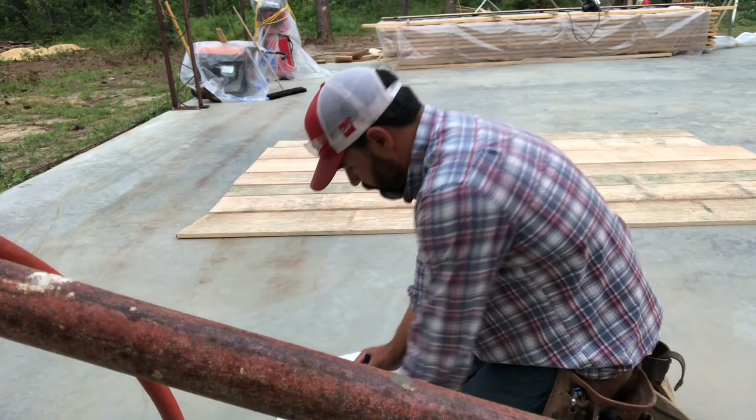Hey guys, Jeremy Moore, and I'm going to show you how I'm building this 30 by 40 workshop. I want to show it to you start to finish.

Approaching something like this can take many different shapes. I've seen videos where people are spending $35,000 on a shop, $25,000 on a shop. I'm going to spend $6,000 on this shop. A driving factor in all of these videos that you'll see, cost plays a huge role.

I am not the kind of person who opens the drawer of my toolbox and there's a checkbook. I want you to understand that as I make these decisions, sure there's going to be people that say those frames look ridiculous, that lumber is going to be, you know, there will be people who critique it. I know there are other options. I'm trying to document an option that says it can be done on a budget that most people think is not possible. You'll realize that you can grow.

I've certainly never laid brick, but I had never laid block until I laid the block for this house. I had never cut up lumber, I've never used a bandsaw mill to cut up lumber. Now we have bandsawed lumber. So there are things that you might say 'but I can't' - I'm willing to say, I bet you can.

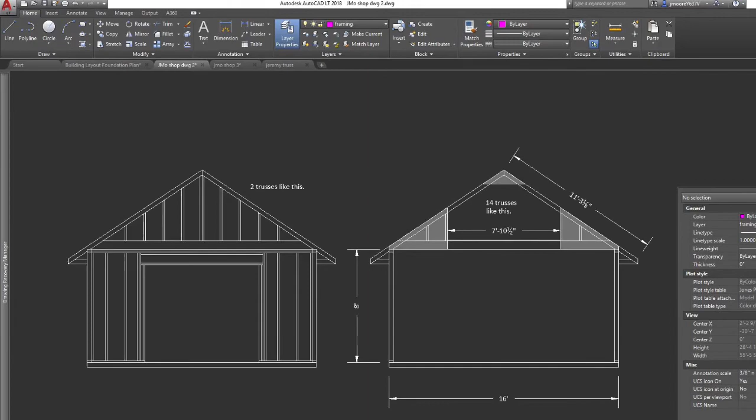My thoughts immediately gravitated to the idea that, hey, I don't even have to buy the kit - I can make the kit. Because now, even though some of the components had to be full length and long and straight, the internal webs between the two chords, they could actually be...

some salvaged lumber, or most lumber supply places have cull piles where they throw away either bent or broken, or warped lumber. And so you could improvise, and cut some otherwise not useful boards into short sections, and over those short sections they're straight enough, or strong enough, whatever the case may be - they would certainly work as webbing.

I didn't have to make a bunch of these frames, just a few, then connect between them with dimensional lumber or purlins that would span the distance, and those could also be things I could possibly salvage from other places. So the design was really starting to take a different shape. All of this was intended to be built out of wood, because that was something I could work with easily, so it certainly was going to look like a home built structure.

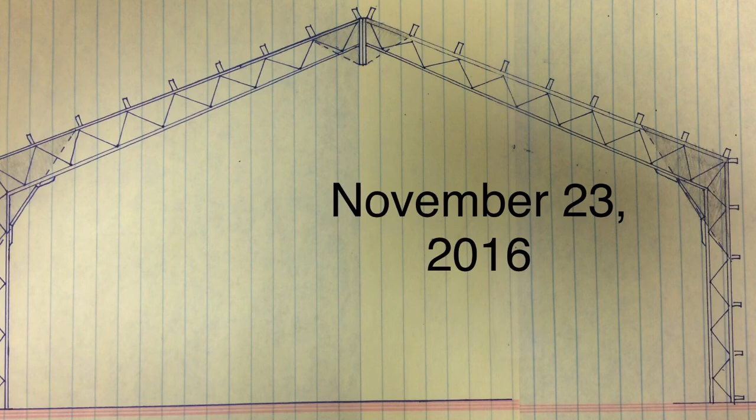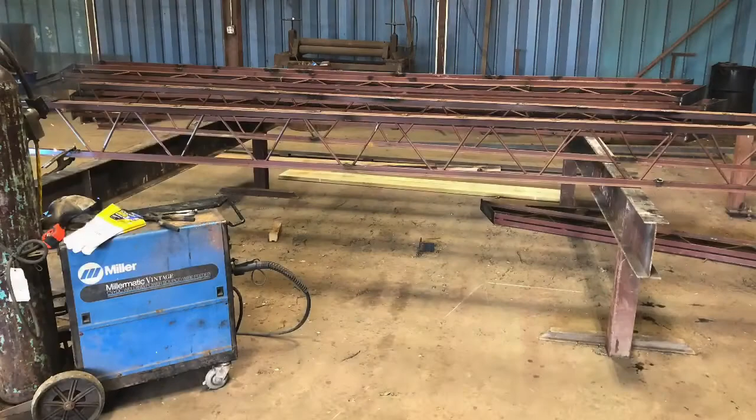But then all of a sudden, we were working on this job and had to do some demolition work, had to tear out a roof structure, and it turned out the roof was supported by a bar joist. I wasn't there when they were taken down, but I came up on the job as these were being thrown away, and all of a sudden the whole design changed. It really started to take shape, and I realized I had stumbled onto a treasure I wasn't going to have to improvise or make. These things were already ready. All I had to do was make it fit the shape I wanted.

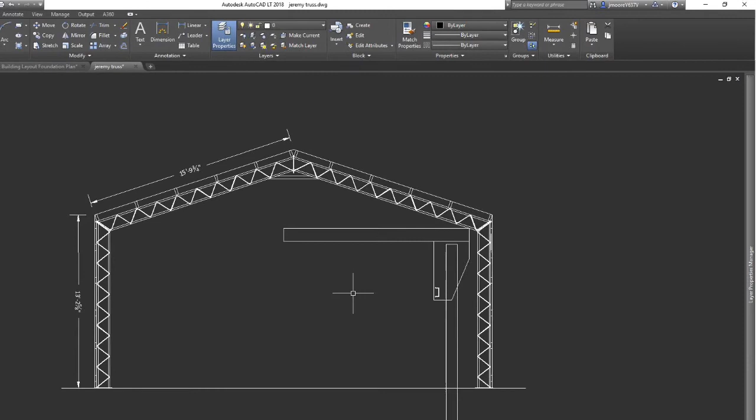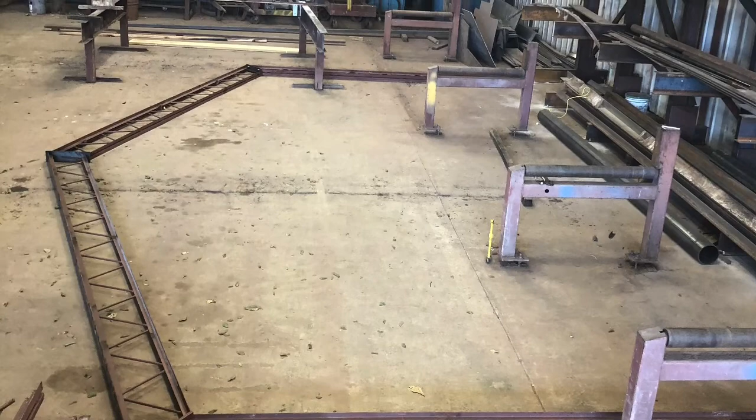So I immediately drew it up in AutoCAD, put base plates on it, figured out the angles, and was able to really envision what the final product would look like sitting right there looking at the computer. I was able to dimension all the cuts, make it exactly how I needed to, and thankfully had access to a bandsaw that was able to cut these trusses to those angles. Then I welded on some plates and I was off and running.

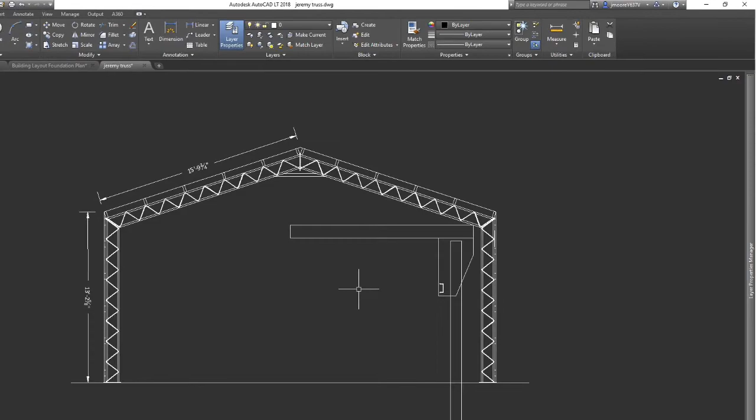It was one thing to finish my framing design, but I had to work to finish the overall design because I really didn't know what the finishes would look like. So I jumped on Pinterest, found a few that really caught my eye, kind of matched what we look like in South Georgia. This was a barn or workshop that I really liked. It kind of drew from what I had come to admire and like about some of Justin Chambers' work over at the Rainfall Project. Certainly take a look at his work.

I really liked that, now that I wasn't stuck with vinyl siding or plywood or any kind of generic siding, I was able to incorporate some board and batten, and this was something I could use the lumber from my property for. Here goes!

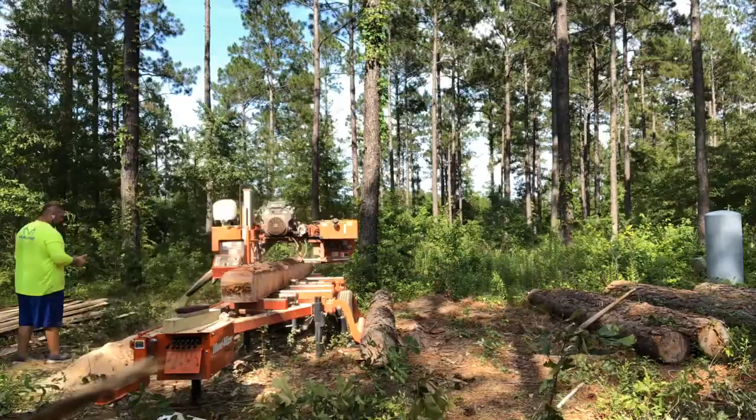As I got the lumber cut up from the bandsaw mill, I was actually able to get him to saw up some wide planks, and now I have incorporated this into my workshop. Finalizing that design, getting to this point, realizing exactly what the target was that I was shooting for, really started to make things feel complete, feel ready to start building.

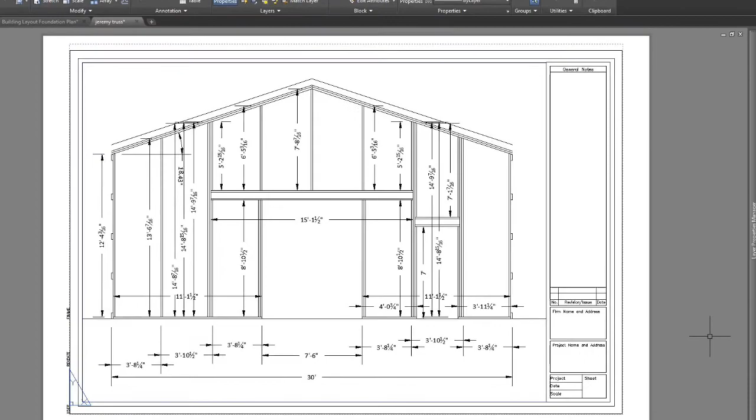The last thing I had to do was generate a set of plans to submit to the building permit office, so I drew up exactly what I intended to build, gave it some framing, dimensions, and overall look, and at this point I was ready to break ground. I had no problems getting permits, and so I had what I needed, and the next thing to do was just start building.

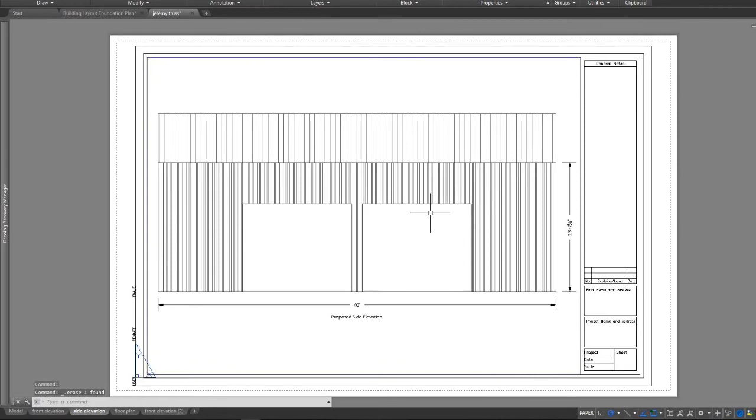I felt like it was probably a good way to end this introductory video by going over a few things that turned out to be crucial steps that helped make this project take shape. If I had not changed from the residential type framing to the frame with purlin and girt type structure, I probably still would not be building. From a finishing standpoint, I have options. I can put metal wall panels on this, I can put siding on this, I can do any of the options that, for me, I have an advantage in.

There's quite a few metal building component manufacturers locally. A lot of them oftentimes have rejects, coils, returns, damaged goods, or anything that isn't perfect, but at least I have the choice to say if I don't want to pay full price, I can make use of this. A lot of times the roof panels I was able to purchase were damaged, but since they were 25 feet long and I only need 16 feet, the damaged part gets cut off, so the damage is irrelevant.

So if you look for ways to take advantage of the opportunities available to you, it may be lumber supply, metal supply, or concrete supply. You never know exactly what things will lean your way, but if you try to look for your advantages and build your shop around those advantages, price per square foot comes tremendously in the right direction. Looking for material supply opportunities is really going to be one of the ways you change the whole landscape of the project.